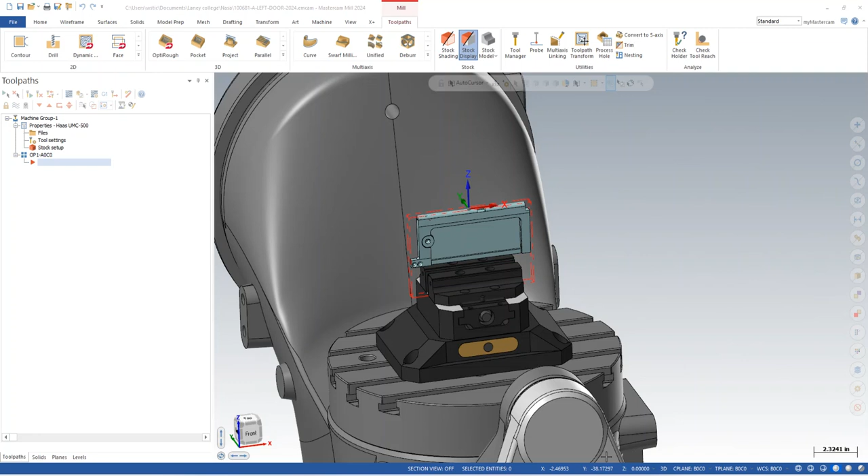Okay, let's start throwing some toolpaths at this thing. Like I said before, I want to start with the outermost features. So I'll start by facing it and then going after these notches at the top.

I'm going to go ahead and grab a facing toolpath. I'll go to wireframe selection, and if you read the message, it says select OK to use defined stock. So I don't actually need to choose any geometry, I can just select OK. Green check.

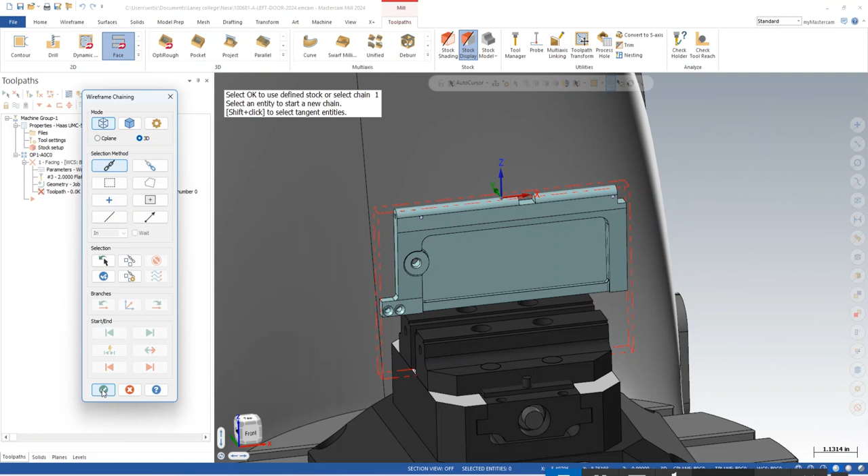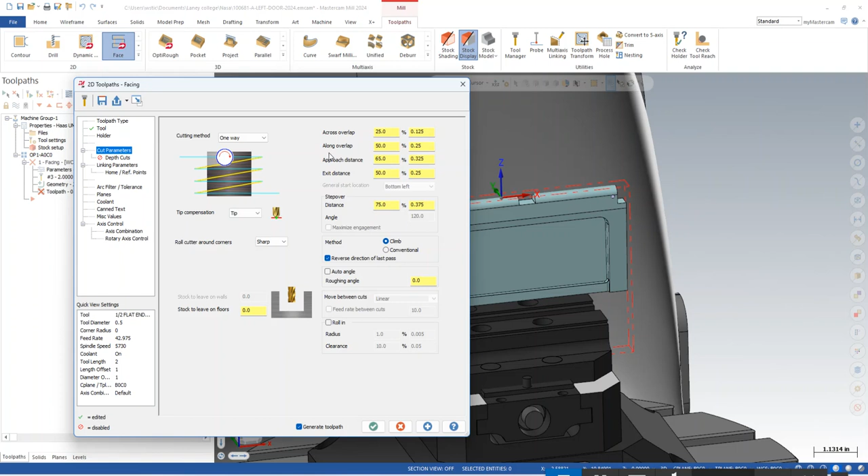I'm going to use tool number 1, a 1/2 inch flat end mill. I'll use one-way cutting method, and you can see the parameters here. If you use my configuration file, you should have all this standard. No depth cuts, linking is going to be absolute 0 for the depth. Nice thing about DWO versus center of rotation, we don't have to do all those crazy retracts and Z manipulations.

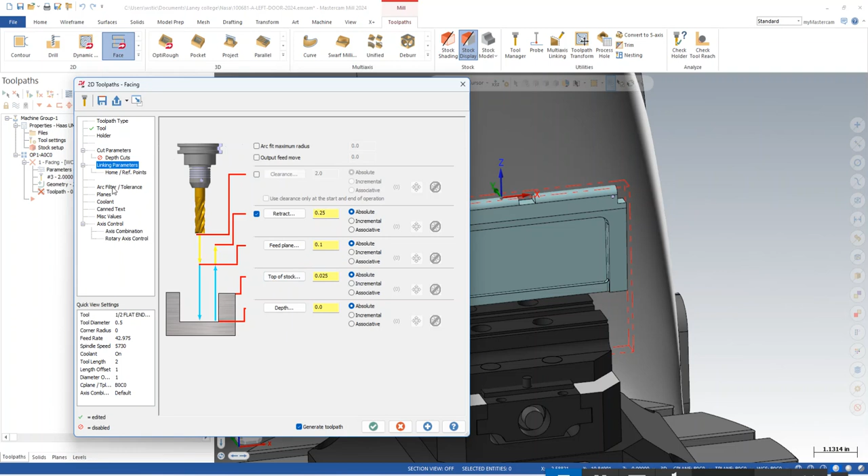Any of this other stuff, check the coolant. Coolant's on, green check. Alright, there's my facing toolpath.

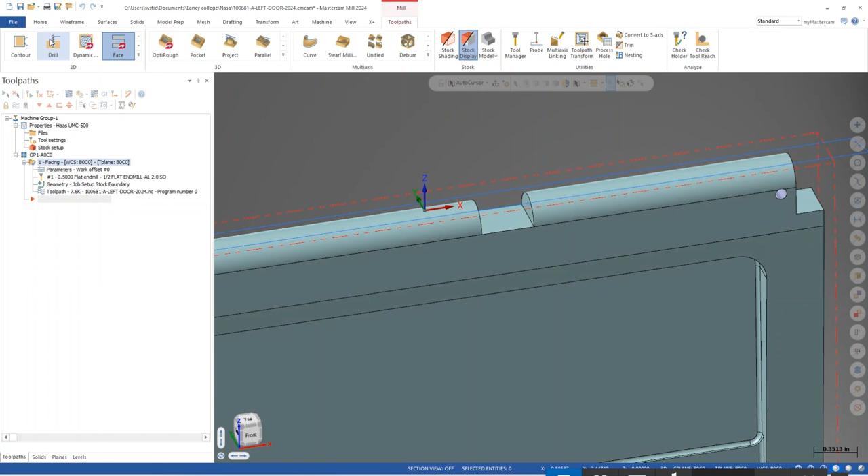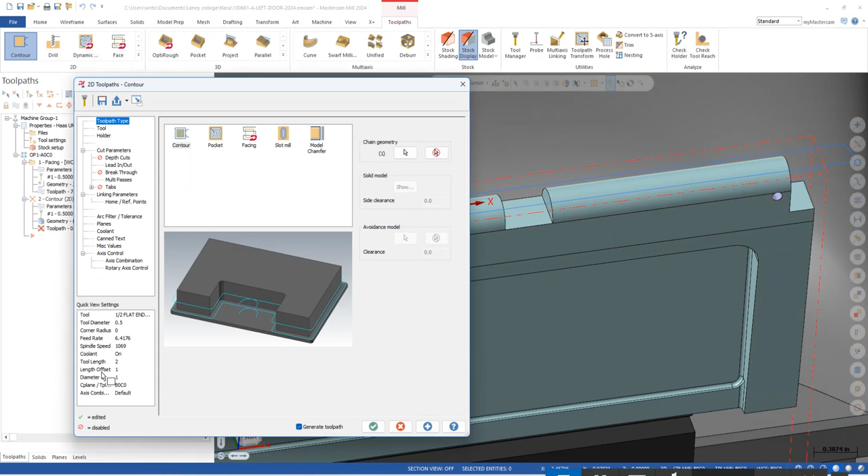Now I'll go for this notch right here, so I'll use a contour for that. I'm going to go to single edge selection. Select this edge going that way, and this edge going that way for climb milling. Green check. For the tool, I'm going to use a 1/4 inch flat end mill.

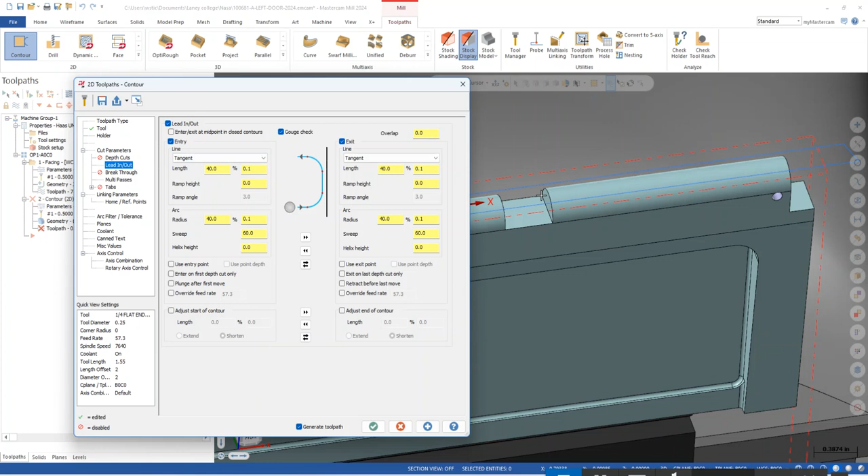Tool number 2, and I'll use wear compensation. For my lead in, lead out - we still kind of have the raw stock, right? So we need to sort of extend the toolpath. I'm going to go ahead and adjust, I'm going to extend it, I'll say 50%.

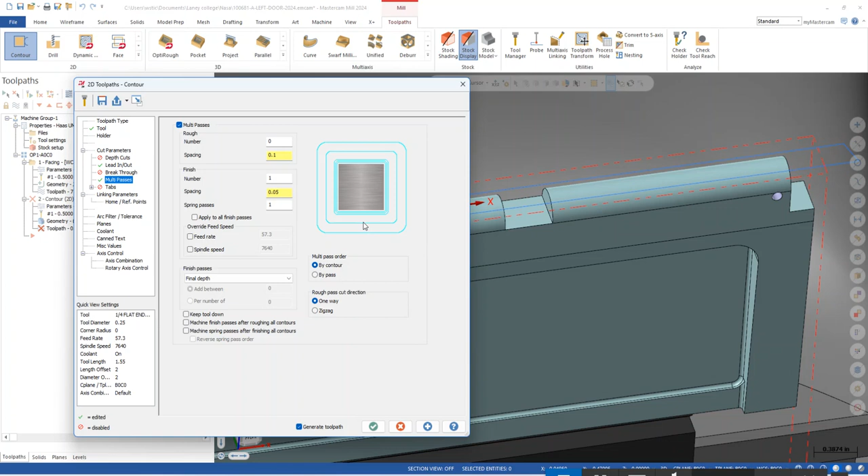And then multi-passes - this is my default right here, is just adding a spring pass basically, so I'll leave it at that. The gap right there is only about 7/16, so one pass on each wall with the 1/4 inch end mill will take care of it. Linking parameters already has my depth because I chose the edge at the depth that I wanted, so I don't need to mess with any of that. Coolant's on, green check.

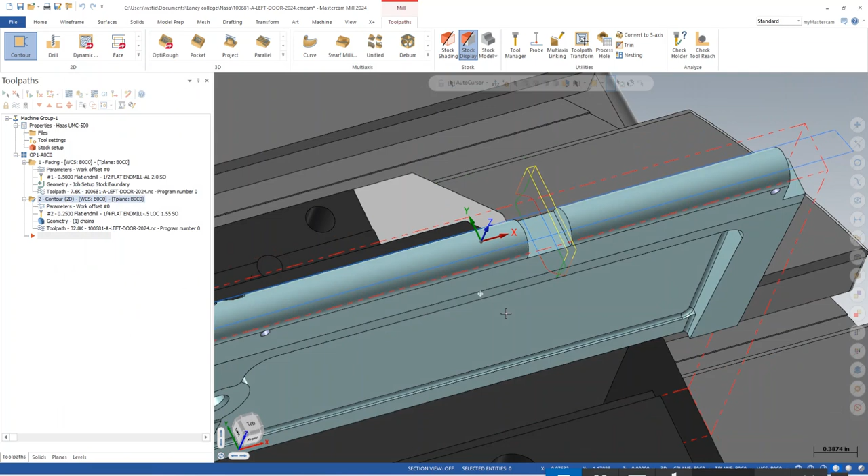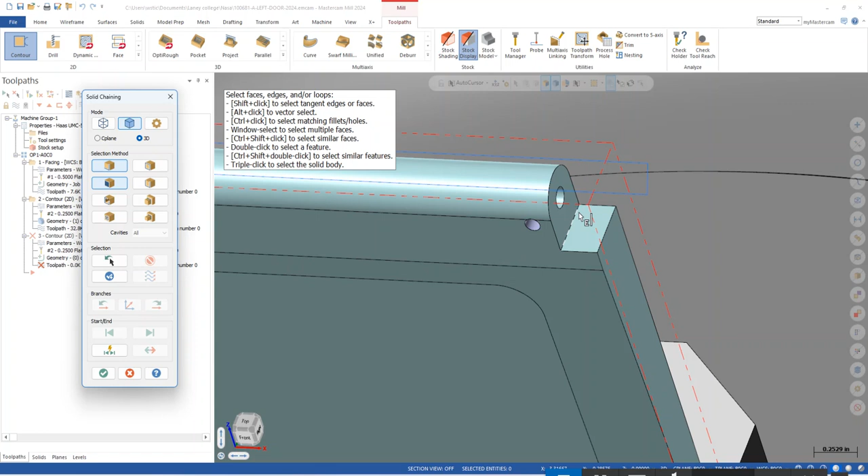Now I'll come over here, this notch here on the side. Again, I'm going to do another contour. Grab this edge in this direction for climb milling. Check. I'm going to keep the same tool, 1/4 inch flat end mill.

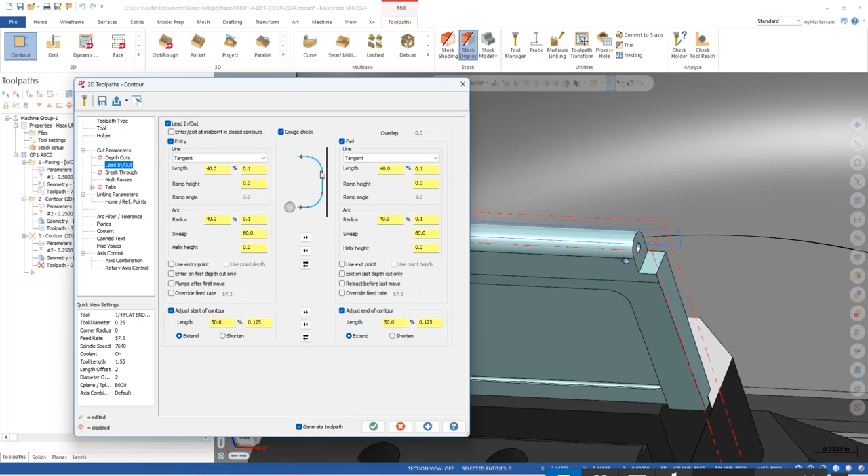Wear compensation, leave all the lead in, lead out stuff the same. I'm going to add some multi-passes this time though - I'm going to do 7 passes at 50 thousandths and 1 spring pass. My linking depth is 433, and coolant is on. Green check.

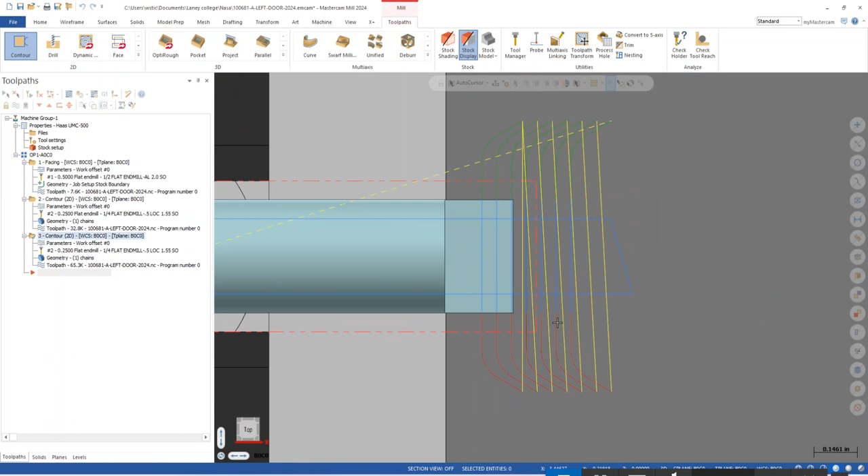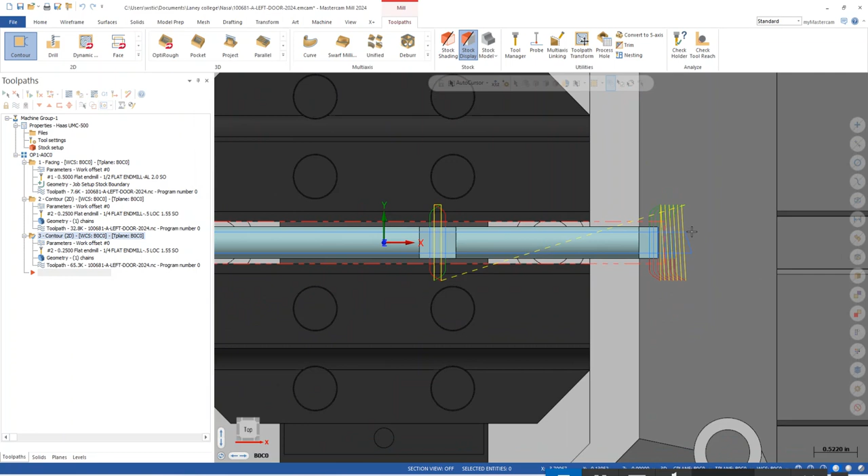So let's do a back plot on that real fast. Yeah, so my first pass is starting to machine the stock, it works its way in. Alright, I like that. Okay.

Now I'm probably going to start working on this back face. So I'll give it a save real quick.

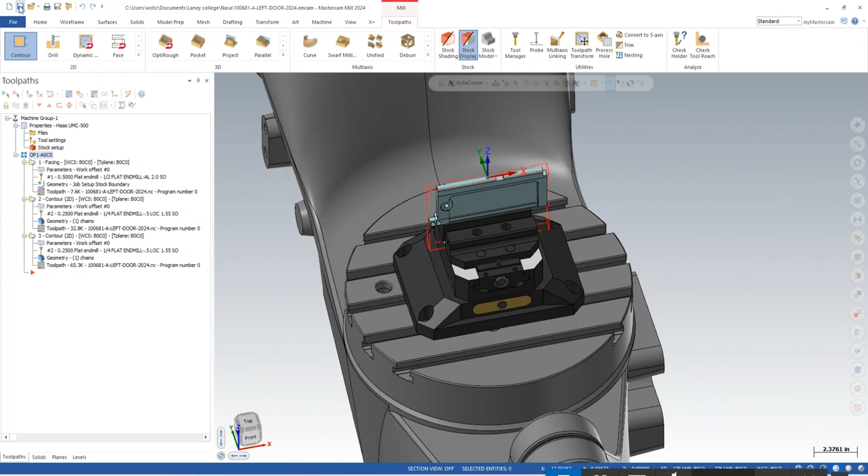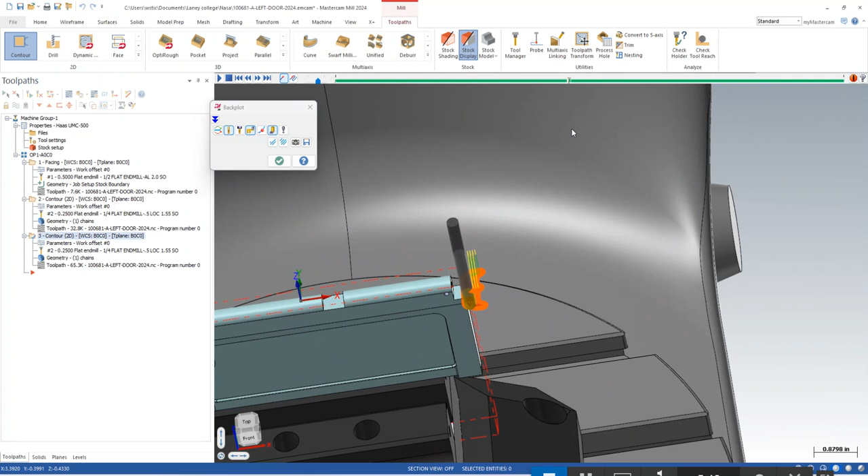Couple things to note real quick before we continue on. If you do a back plot, for me I like to have what they call quick verify. That's the little orange that you see right there showing you the toolpaths. That's this button right here, quick verify, on the back plot.

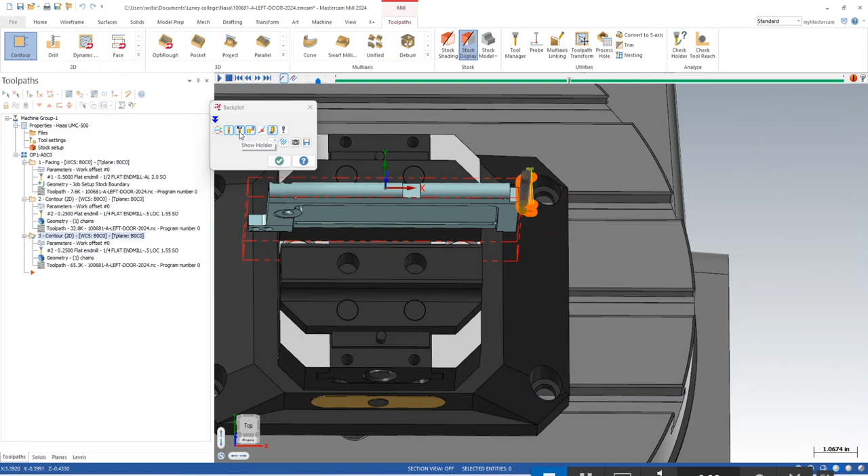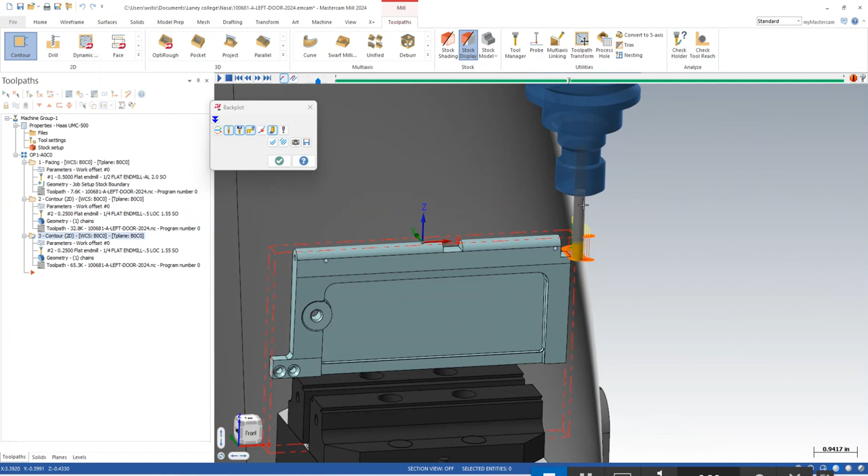And also, if you select to show the holder, that's the one really nice thing about this tool database file that I provided - special thanks to the first semester students who got that all dialed in. It's the actual holders that are in the machine with the proper stick out and cutting length of the tools.

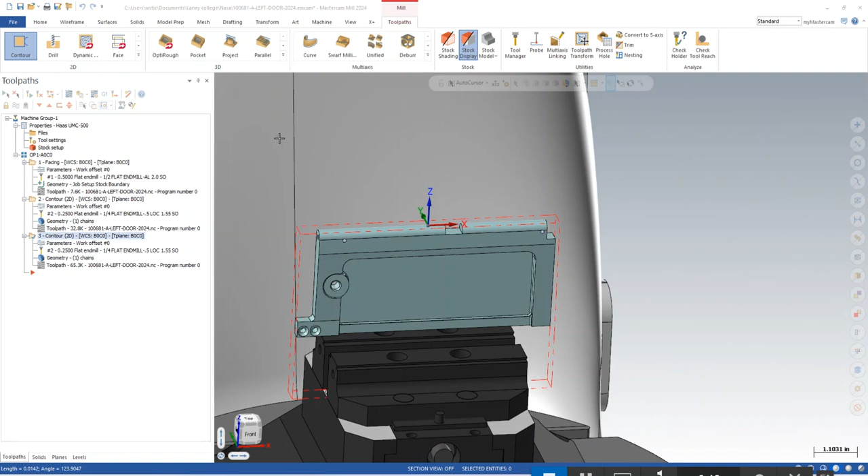So that's good for that. But now that I just looked at that toolpath, that tool doesn't seem to be right. That cutting length right there on that tool seems to be too short. So let's go ahead and check that real quick.

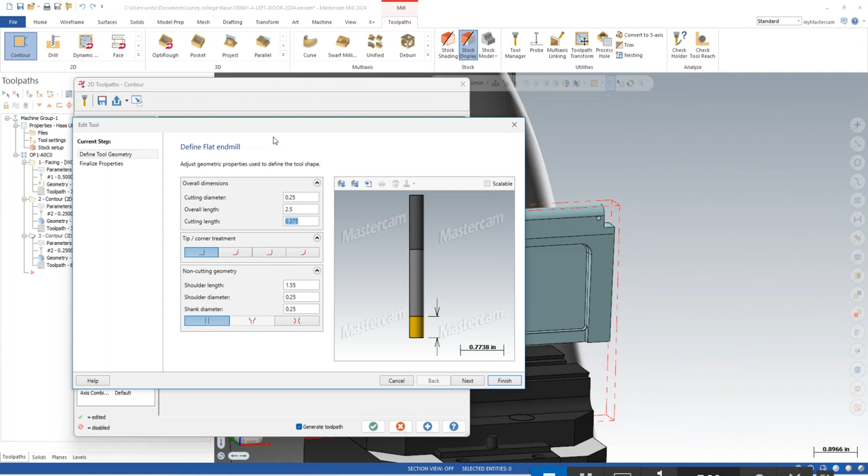Go to parameters, go to my tool page, double click on the tool, and cutting length for some reason is 0.375. Should be half an inch. So I'm going to change that to .5. Finish.

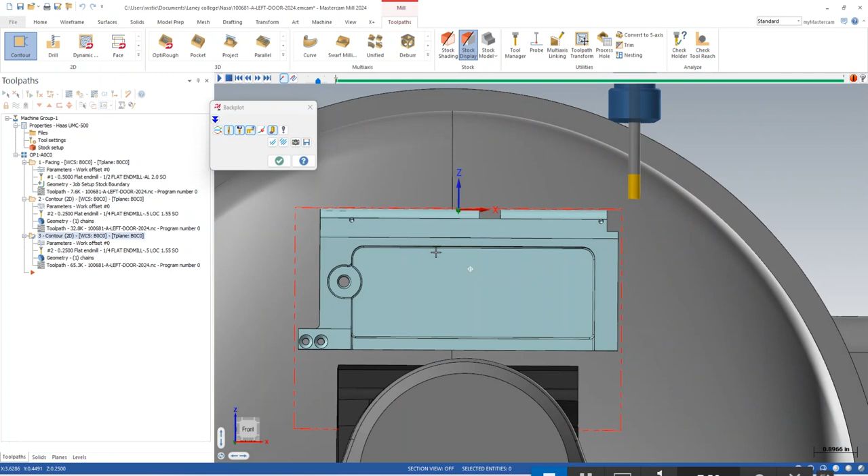Update assembly and all operations that use that assembly. Green check, green check. Regenerate dirty operations. And then we'll go ahead and look at that again. That looks better - now I've actually got the flute length to cut my notch out right there.

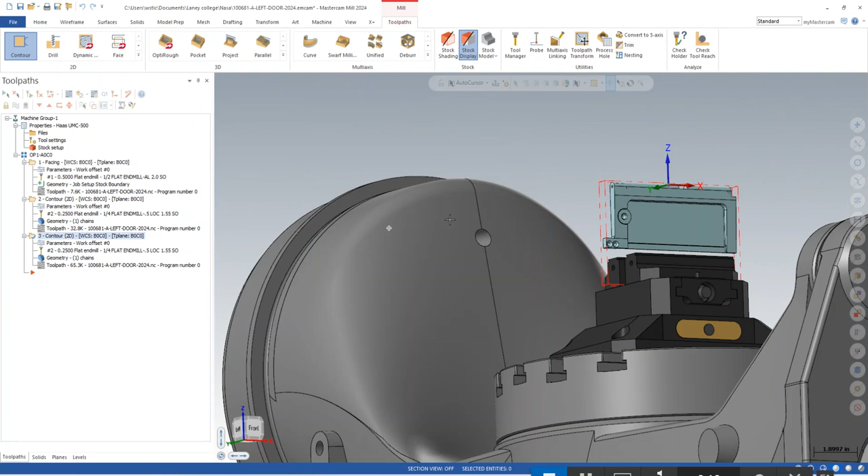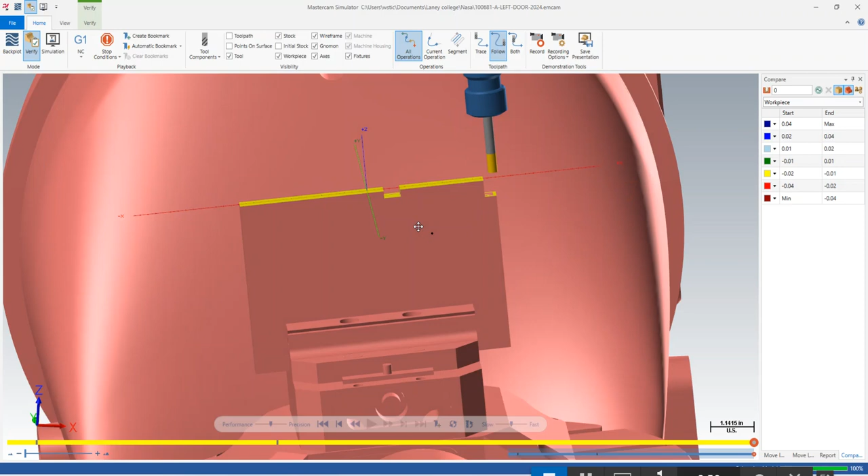Let's do a verify real quick just to check. I'm going to go ahead and select workpiece. It's going to show me all of these parts of the machine, so when we start rotating it around we can look for collisions. Play that. Okay.

Alright, I'm going to go ahead and minimize these toolpaths. Create a new toolpath group.

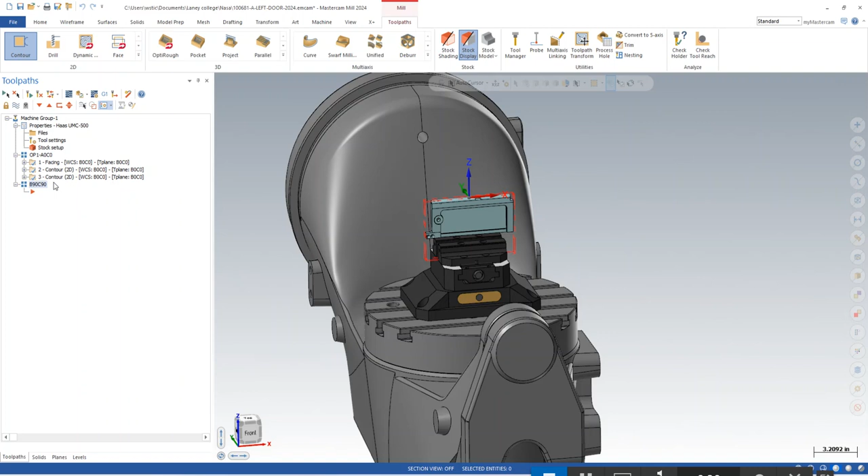C90. Gonna work on this face right here. So let's go grab our plane right there. We're gonna have to move all our planes to meet up with our B0C0.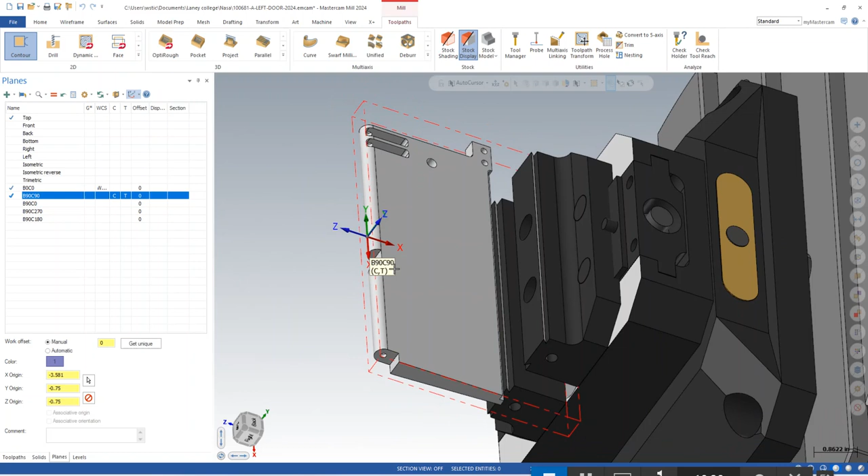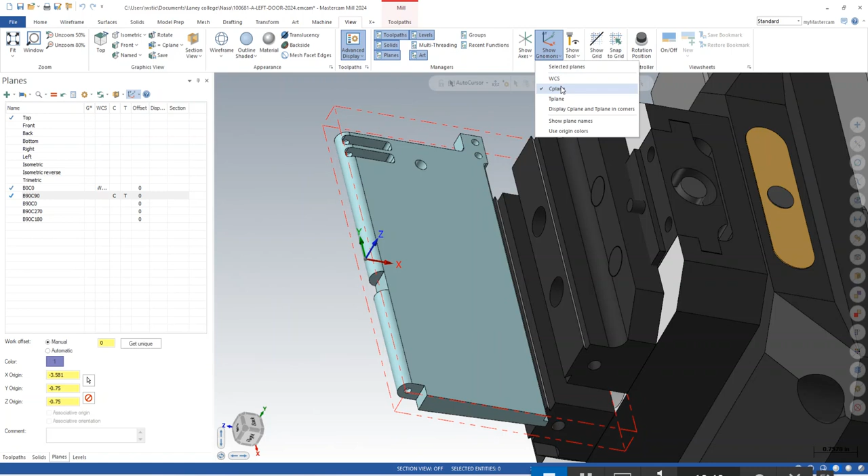Just for viewing, I want to know what my C-plane is. I know where the WCS is, so I'm just going to show that. And then I'll probably hide the UMC trunnion because that's going to get in the way. So back to levels.

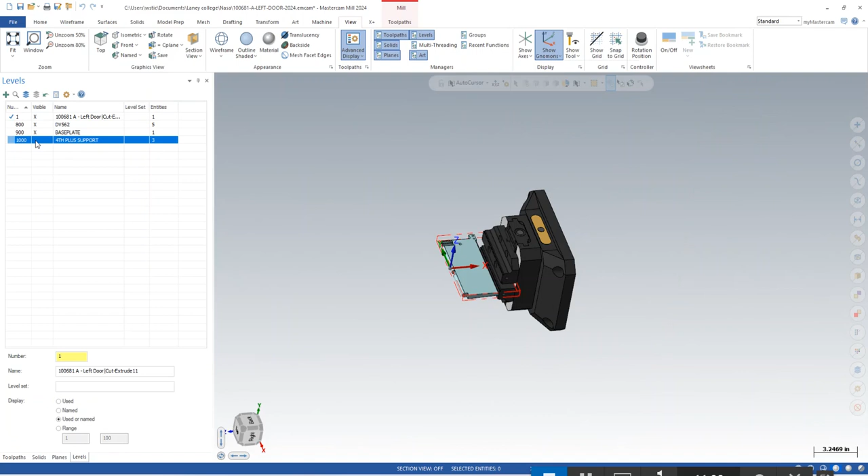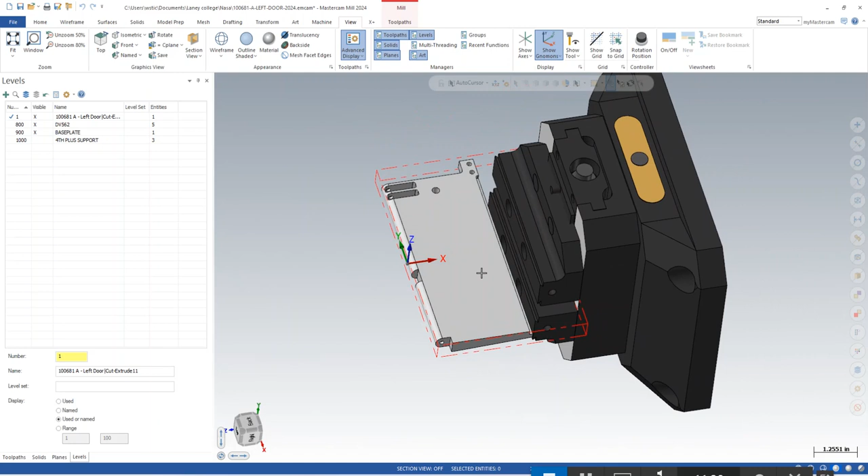Like that. I should mention too that you don't necessarily have to program this part exactly the way I do it, but that's up to you. You do need to use the tools that we have in the machine, so no changing or adding tools.

Alright, so there's gonna be some toolpaths that are gonna need some geometry that the solid is just not going to give us. So I'm going to just create some wireframe geometry for this orientation, this face.

Go to levels. I'm going to create a new level, call it level 20, and I'll say B90, C90, wireframe. Alright, that'll be my current level.

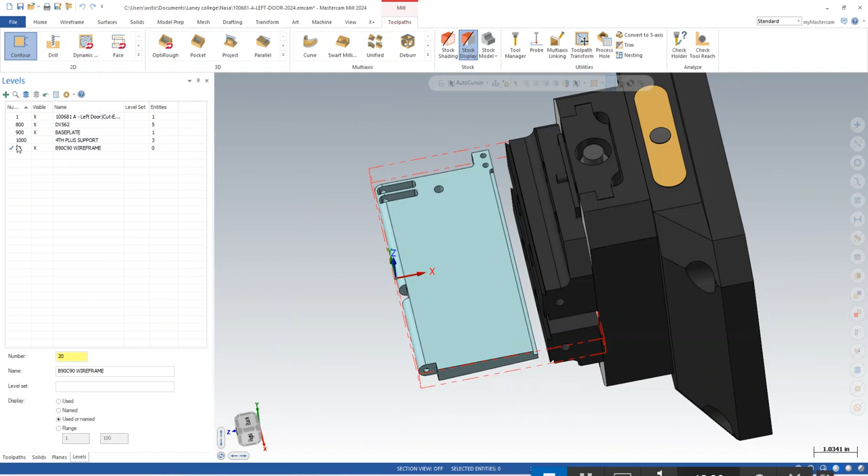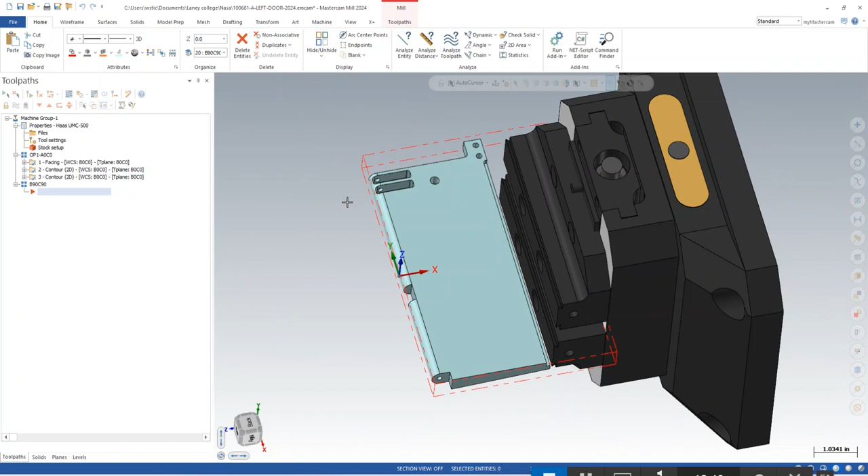Go to my home tab. I'm going to get some red wireframe here, starting with basically just the geometry around the perimeter of the part. So if I go to wireframe and choose silhouette boundary, then it's going to tell me to select on the body, so select the model, end selection and green check.

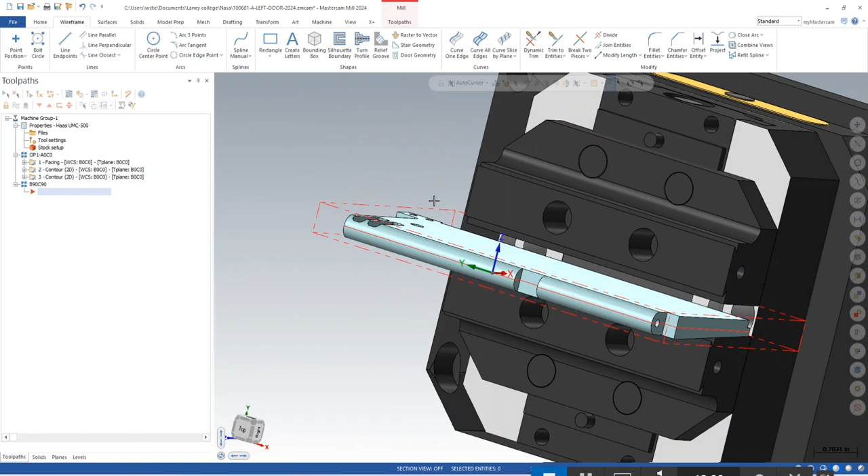There it is right there. Just go ahead and hold the shift key, select on any part of that wireframe we just created, and then click on it and transform, translate. I'm going to move that up in Z 0.25, so it's kind of at the top of the face there.

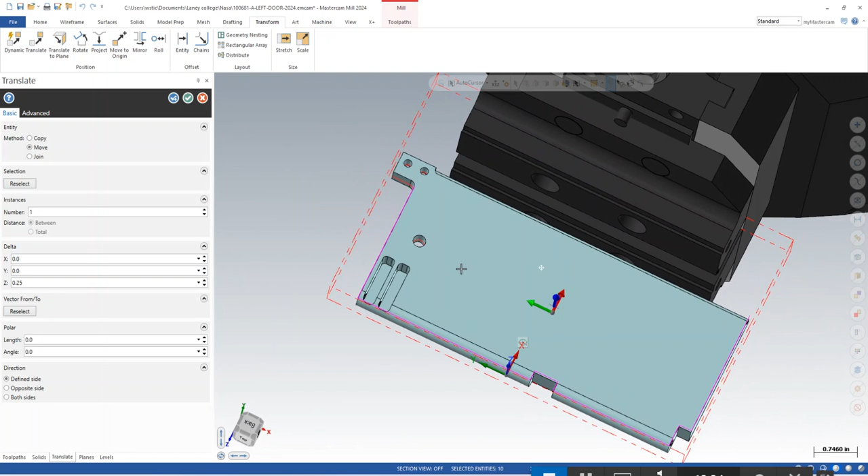Get all of it. So grab the rest of it, do the same thing.

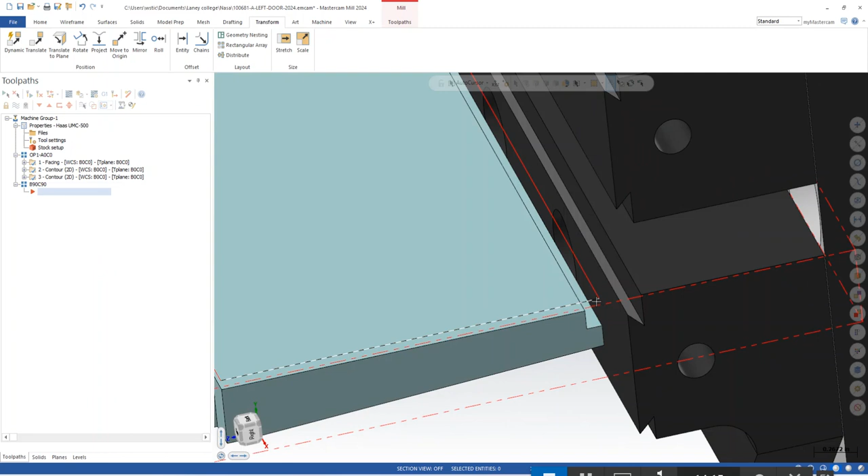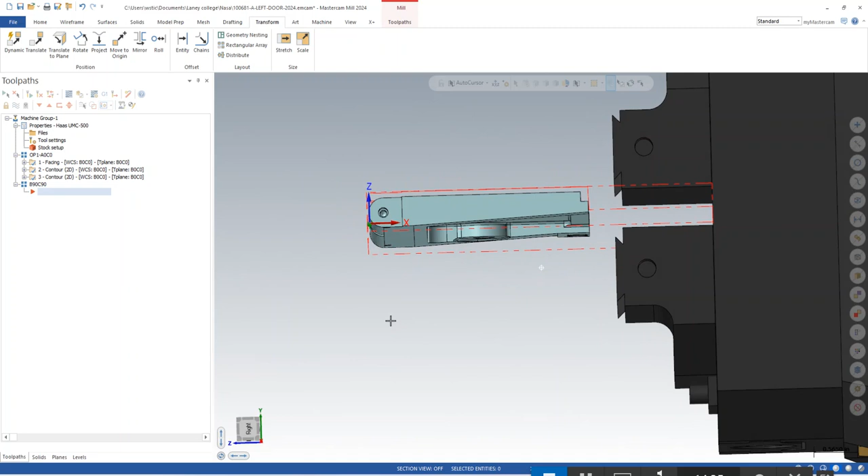So now I'm going to start with basically facing this surface, but I'm not going to use a facing toolpath. I'm going to use a contour because I don't have to worry as much, I can control it better how close it gets to the vise.

Choose my wireframe, single wireframe entity, and I'm going to select that line in that direction. I'm going to go ahead and grab that 2-inch insert mill.

And I'm going to go ahead and go with 3000 on the surface speed, and I'm going to go with 4 thousandths on the chip load. Plunge rate will be 60. Rapid retract.

Alright, cut parameters, wear compensation. I'm going to tell it on stock to leave on walls minus 0.200. So it's going to make it go past the geometry I selected and get closer to the vise, but there's a little over 300 thousandths clearance there, to give us some room later when we use the small tool to get that little cutout and the tab.

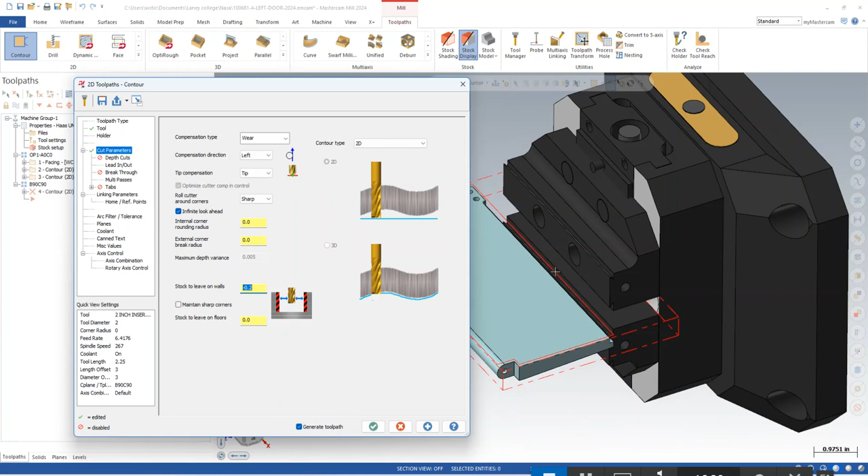Okay, so I'm going to use depth cuts as well, and my max rough step will be 50 thousandths, and I want to do one finish on the floor, 5 thousandths.

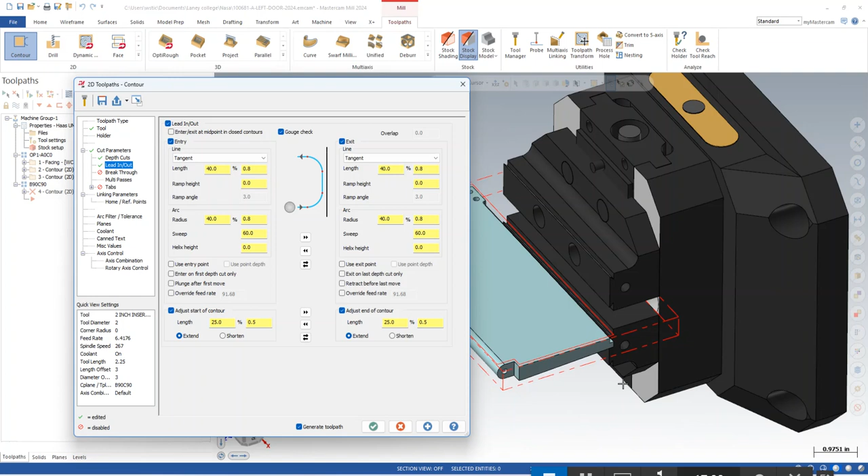Lead in, lead out. I'm going to change the extension to just 25% of the tool. It's a bigger tool, so smaller percentage, just to get us, since that geometry doesn't extend to the stock, that'll help us get a nice straight line across there.

Multi passes, do 2 of them at 1.5, and I do not need a spring pass. And then my finish passes need to be at all depths.

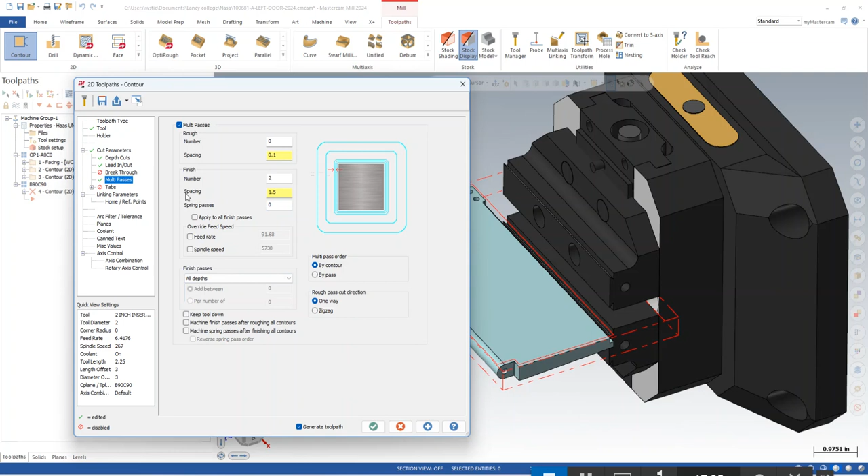Alright, so linking parameters, top of stock is 0.25. My depth is 0.1875. And coolant should be on. Green check.

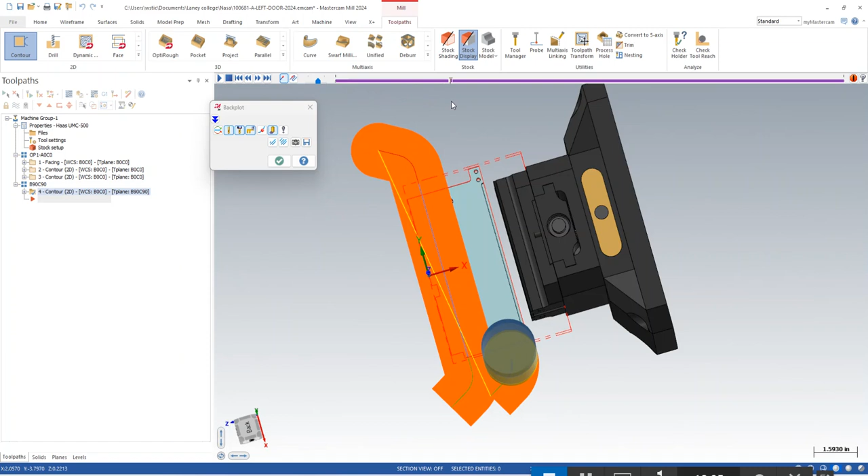Alright. Looks good there. Save that. Hide it.

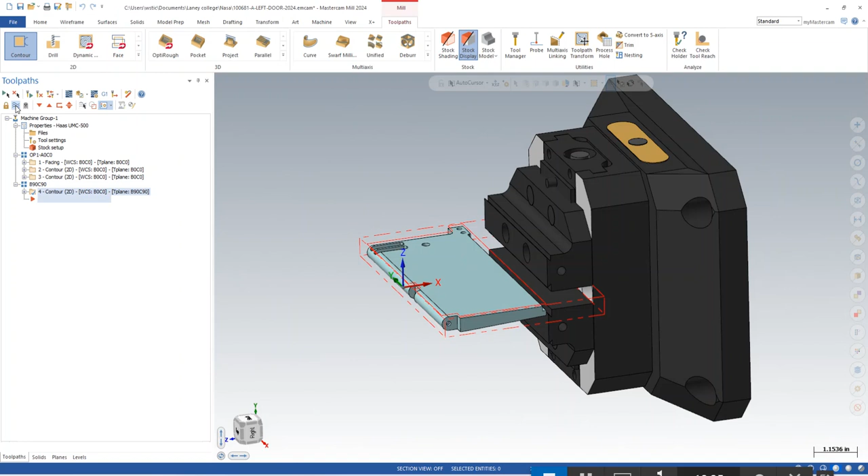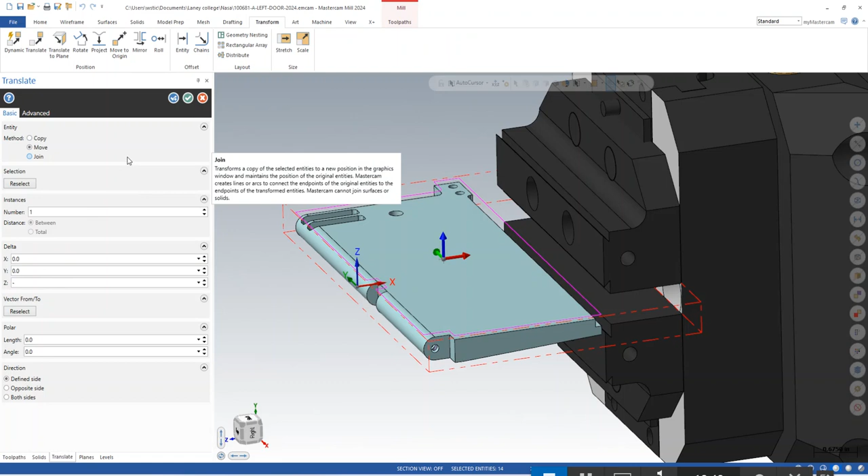Okay, I don't really like the way this wireframe is floating in the air there, so I'm going to go ahead and just move it down to be in line with the surface. So hold the shift key, click on a part of it, and transform, translate. It's going to be minus 0.625 in Z. Alright.

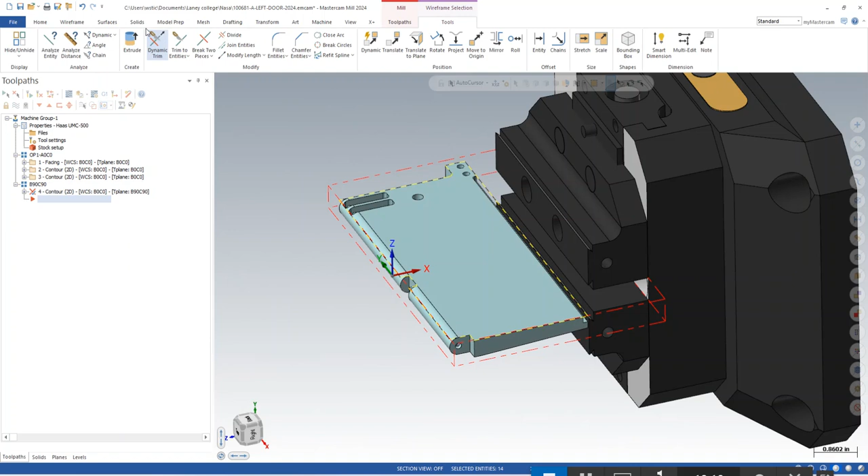And then maybe red wasn't the right color, since that's the color of the silhouette stock. So if you want to change that, you can do the same thing. Hold the shift key to select it all, go to the home tab, and you can change the color there.

This is your wireframe, solid and surfaces, so you can change colors there. Now that I changed it to blue, the next wireframe I create is still going to be red, unless I change it right now. Let's see, now if I create something new, it'll be blue. So that's how that works.

Regenerate doesn't affect anything because we used absolute on our Z's, so that's still good.

So now we're gonna get these sides of the part. I'll start with this side over here, and I'm going to go back to another contour.

One thing before we do that, we should make sure we got our planes correct. That's something we didn't look at. Planes: WCS should be the B0C0, and the tool plane and construction plane are the B90C90. Make sure you have that. Again, you can check it here as well - WCS, C and T on the correct planes.

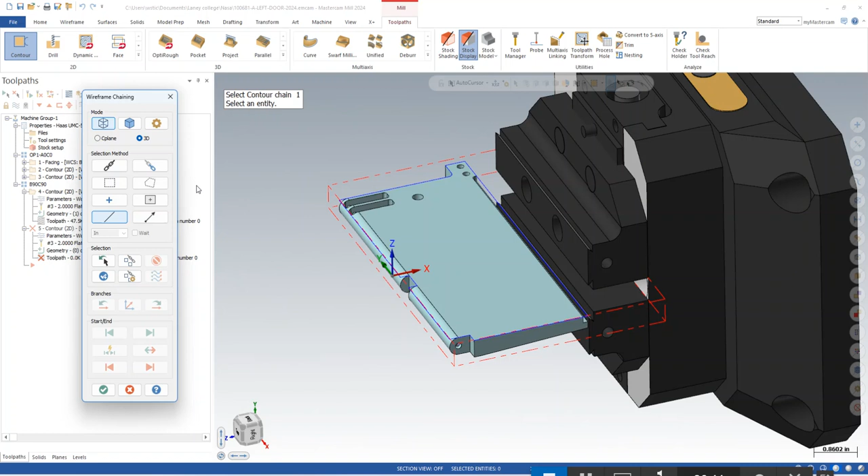Alright, so the contour. I'll use a single wireframe entity. Check. I'll go back to the 1/4 inch flat end mill. Cut parameters - I'm going to change my stock to leave on walls back to 0.

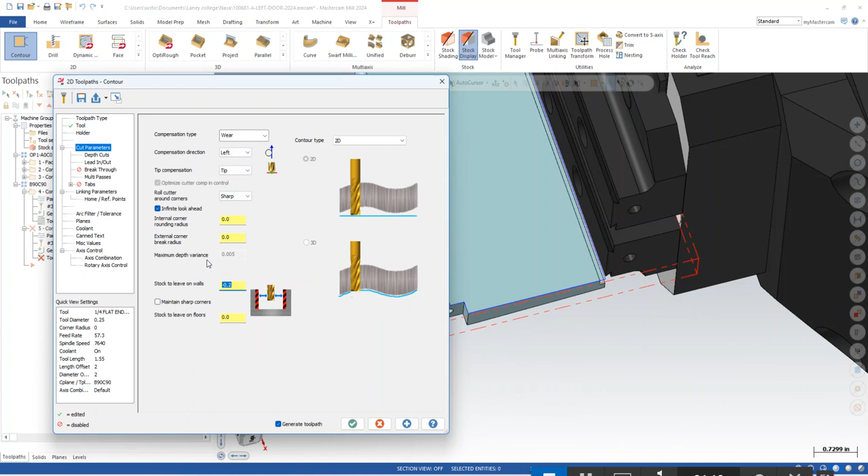And depth cuts, I don't need them. Lead in, lead out - I'll go ahead and leave that as it is. Multi-passes, I'm going to keep 2 at 25 thousandths, and I'm going to go with 1 spring pass.

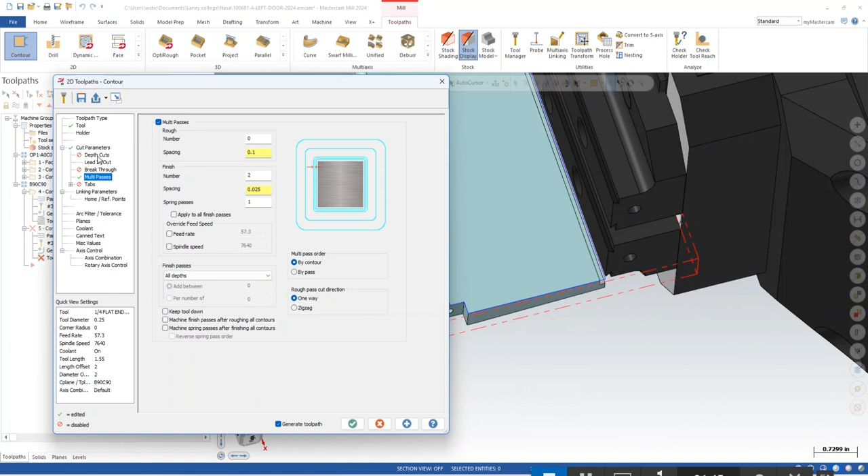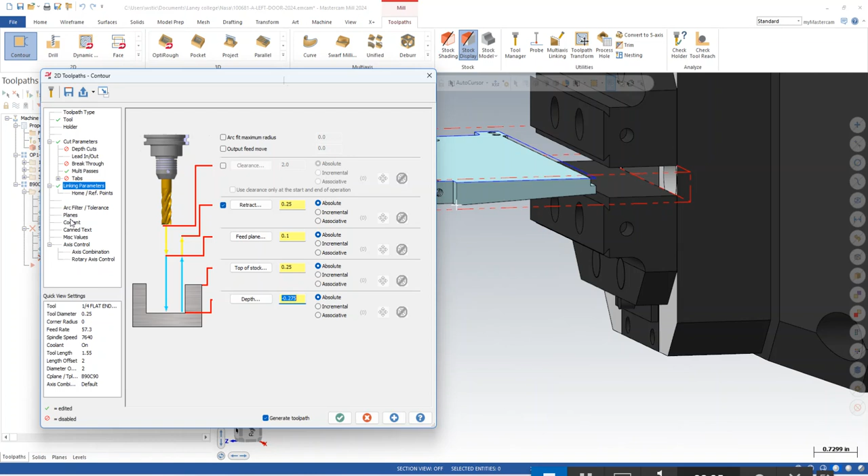All depths versus final depth doesn't really matter since I'm not using depth cuts. And my linking parameters, actually I want that to go all the way down. Get the whole piece of stock, not leave like a little flange down there. So I'm going to go minus 0.250 would be to the bottom, so I'll go a little bit deeper than that - minus 0.275. Since I already cut 0.062 off the top, I can go down an extra 0.025 and I still have the flute length for that, so that's no problem. And planes are correct. Coolant is on, green check.

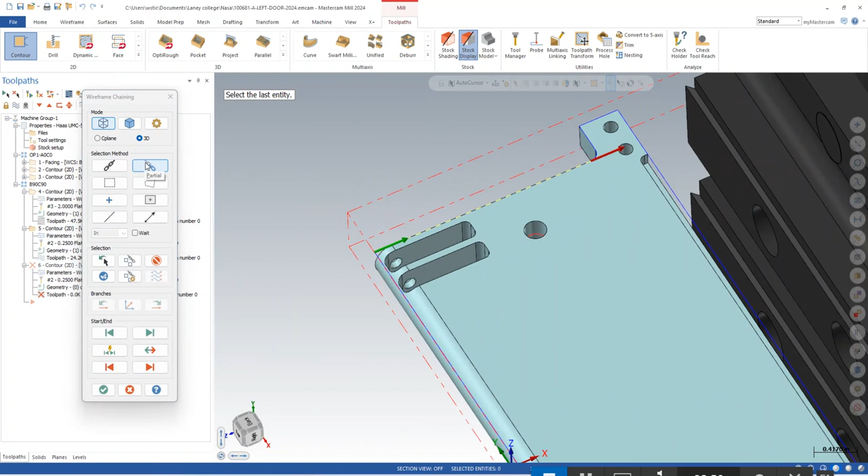Alright, let's go ahead and hit the other side now. Go with another contour. I'm going to select this edge, and I'm going to do the partial chain. I'll start with this line, and I'm going to end with this line here.

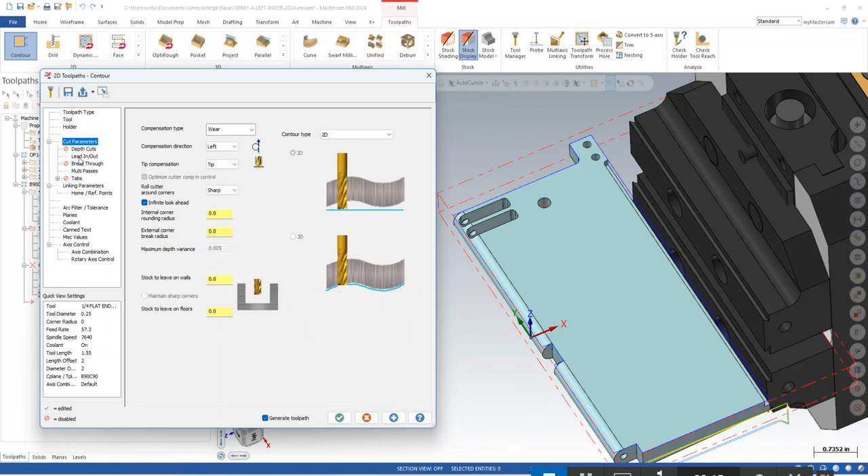Tool is going to be the 1/4 inch again. Cut parameters, and lead in, lead out - change that to 50% and no adjustment on the beginning.

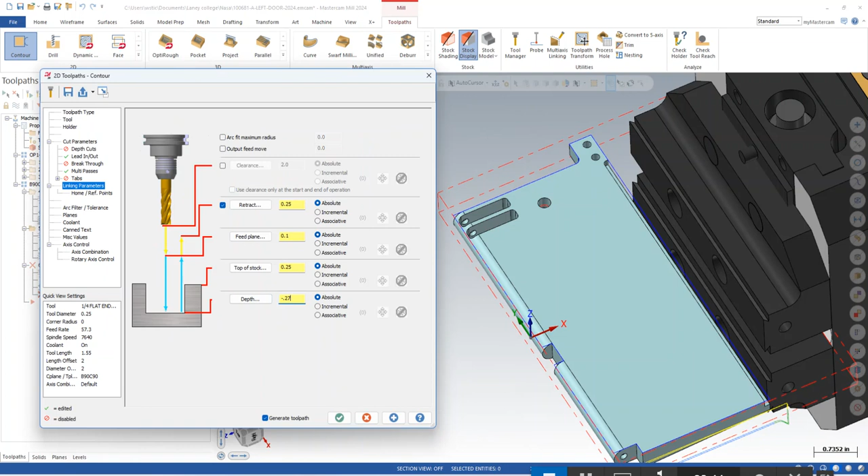Multi-passes, I'm going to do 10 passes at 50 thousandths, 1 spring pass. And my linking parameters, minus 0.275 on the Z. Coolant's on, and that looks good.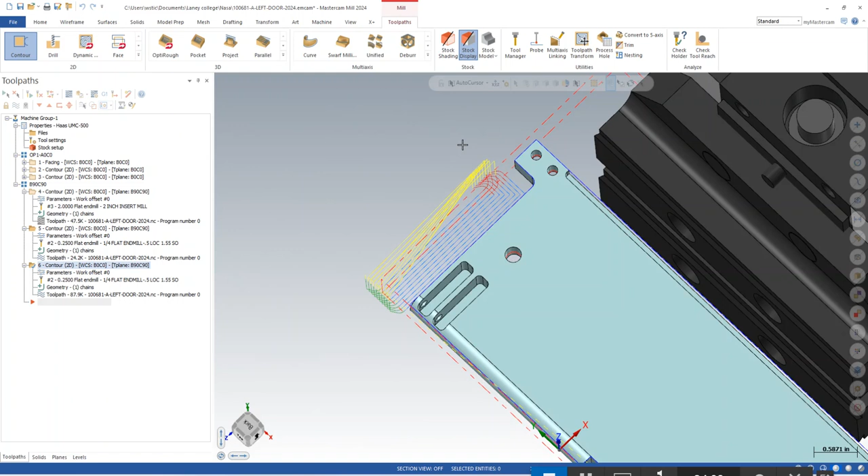Now I didn't continue this on to here because then it would have made all these multi-passes way out here, cutting air, and cutting air is a waste of time, so I didn't do that.

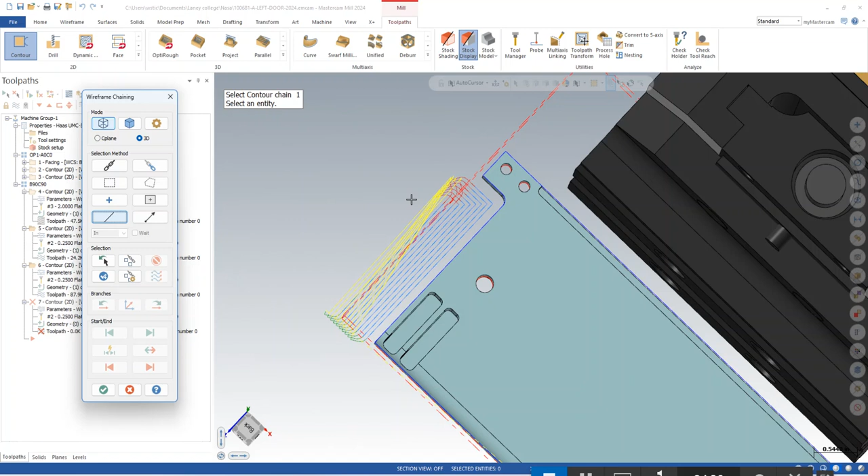So now I'll add another contour just to hit that little edge right there. So contour, single entity, get that line right there. Check, same tool, same cut parameters.

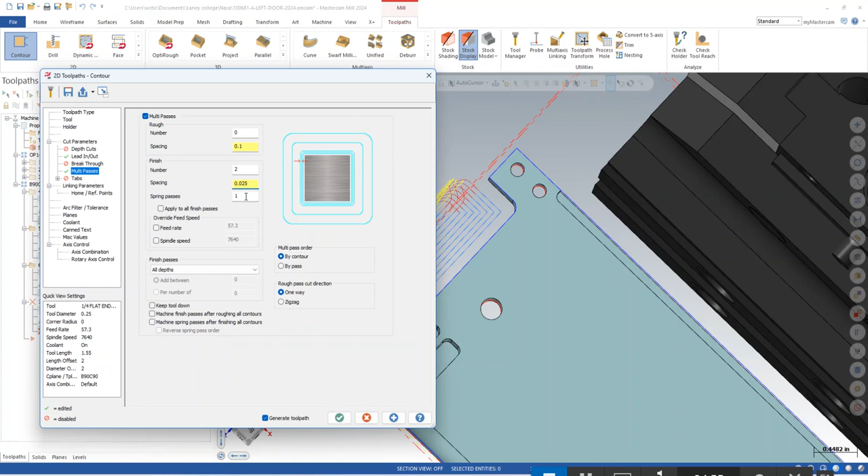Take off the adjustment, I don't need that. Multi-passes, I'm just going to go 2 at 25 with 1 spring pass. Same linking parameters, minus 0.275. That's good right there.

Then I just need to come back with a remachining, because if I analyze that corner, it's got a radius of 0.1, which is a little bit smaller than my 1/4 inch end mill. So I'll come back and remachine it with the 1/8.

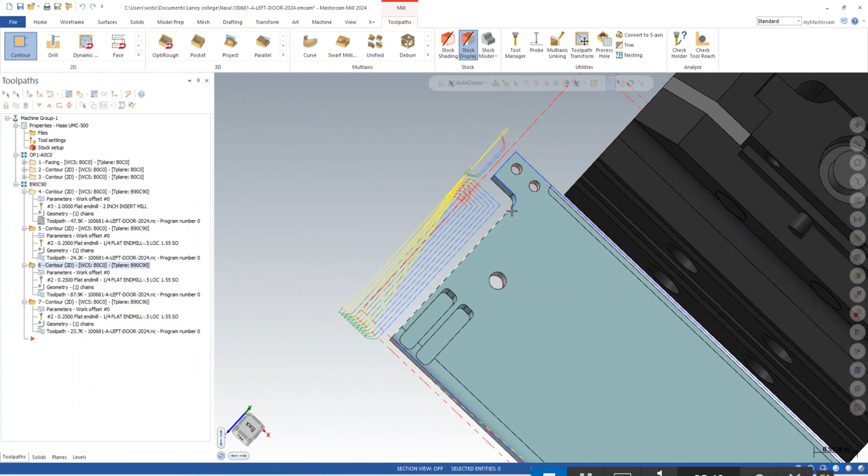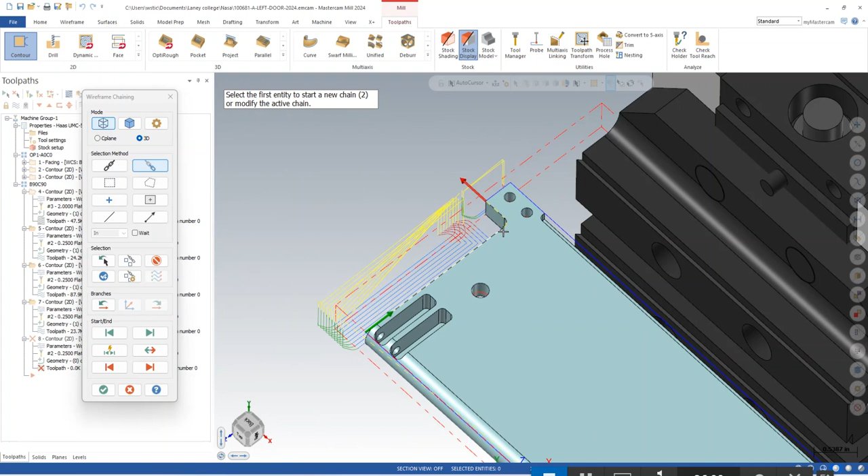So contour again, select there to there. Alright, it's not going to do the whole thing. We're going to tell it to remachine. So it's going to calculate what the 1/4 inch could not reach, and it'll make the 1/8 inch end mill just do that.

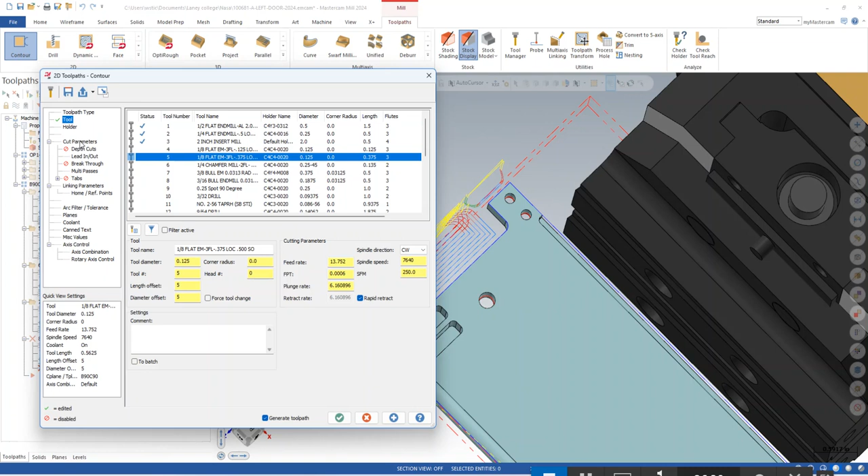So green check that, and find the 1/8 end mill. It's going to be tool number 5 with the 3/8 length of cut. Cut parameters, and over here under contour type it's going to be remachining, and we're going to say the roughing tool was 0.25 diameter. I'm going to change this to 1%, and this to 20.

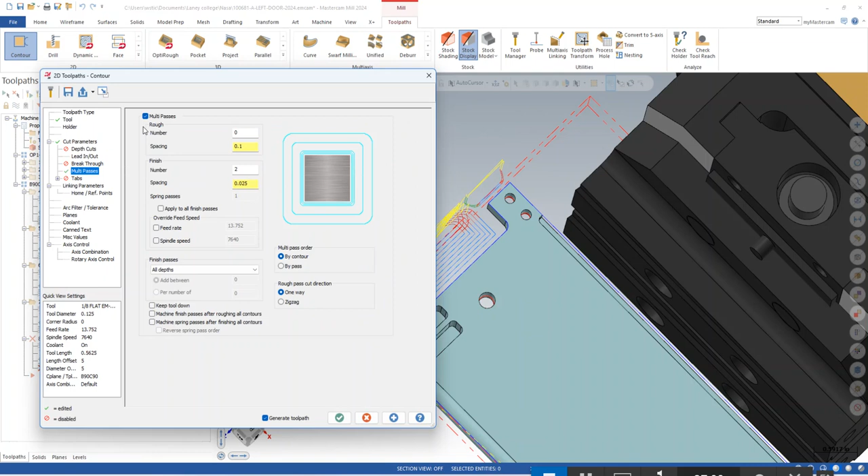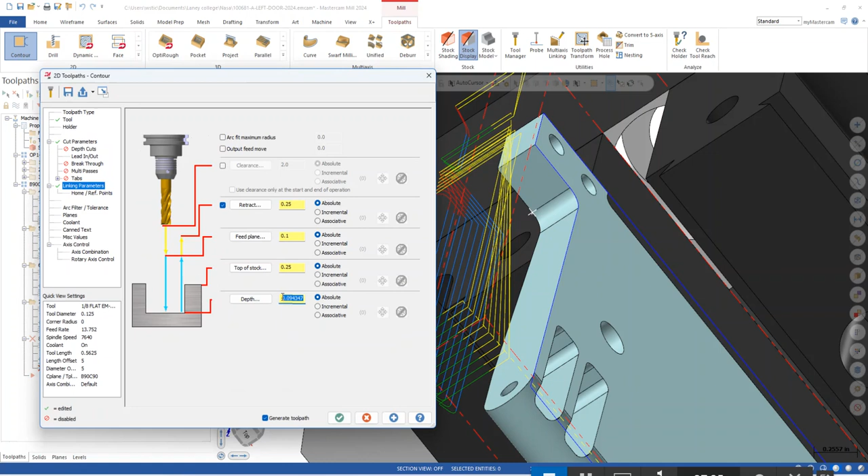Okay, lead in, lead out, multi-pass, I don't need that. Actually, let's see, click depth, click right there. So let's say minus 0.1. Green check.

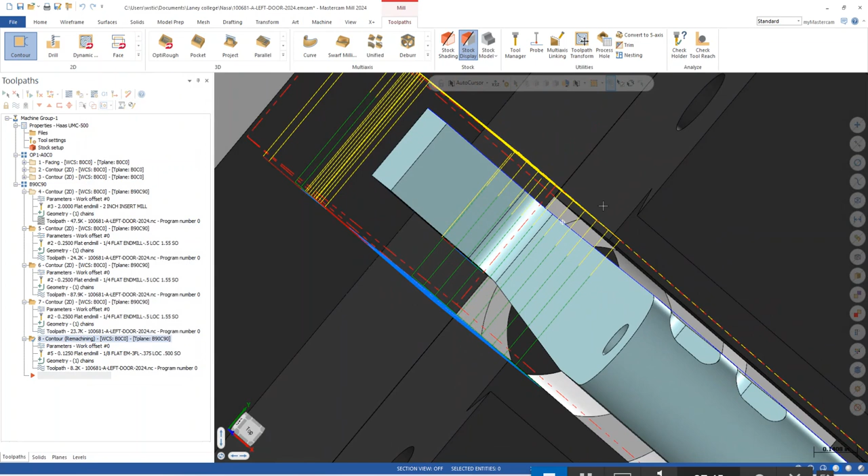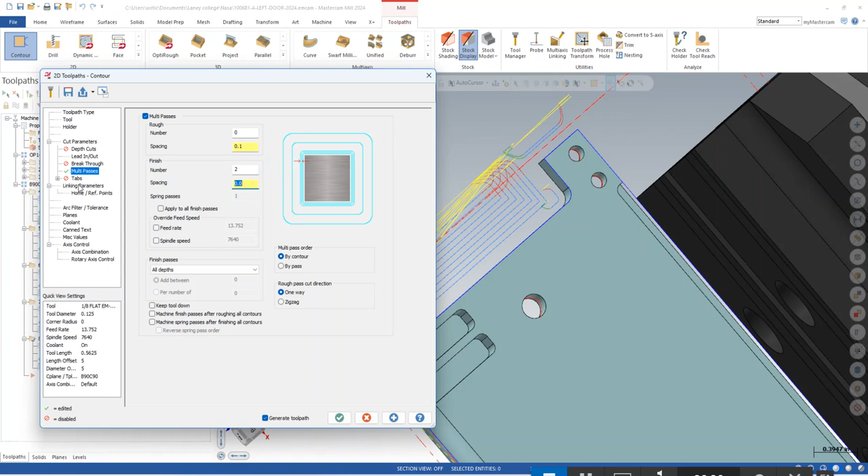Second thought, I think I'll add a spring pass to that last one. So multi-pass, we'll go with 1. Doesn't want to give me the spring pass - that spring pass is grayed out. Just go like that. Let's see what it does. 1, 2. There we go.

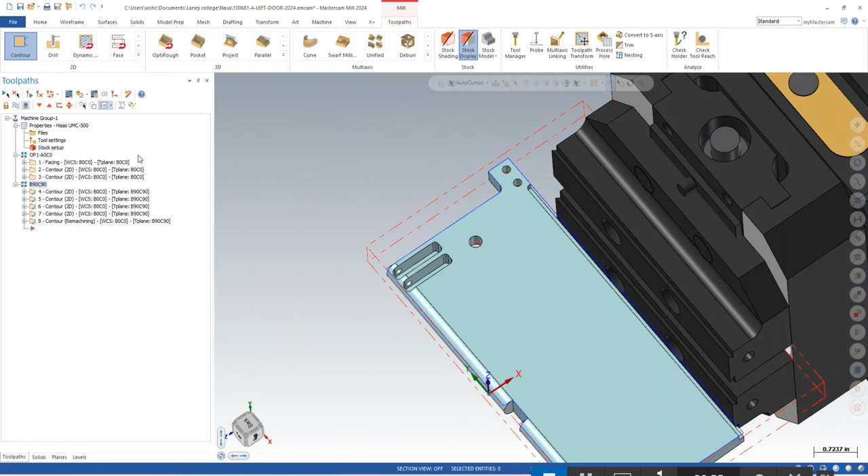Alright, so it's a good start. Save it. Run a verify real quick, see how we're looking. Alright, so far so good.